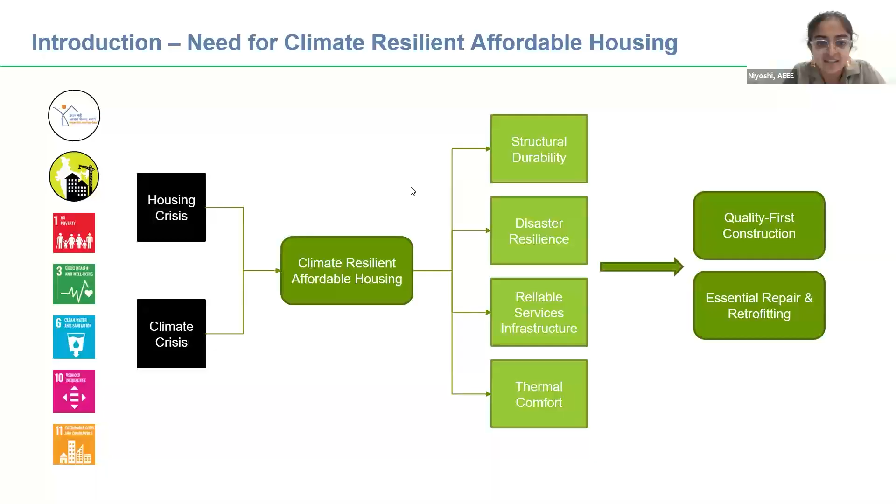Thank you for setting that context. So to talk a little bit about Baprola and why we chose to start from here.

One thing to highlight is right now India's official estimated housing shortage is about 19 million homes. There are also independent studies that say this ranges between 29 to 50 million homes. So when you have such a large housing shortage, it's important, of course, to build new housing, but it's also important to look at what housing is already built and how can you ensure that continues to remain livable, and the investments that have happened in the past continue to bear fruit today, are useful, and we're making the most of those.

That brings us to a particular kind of housing that has been built historically in India. The approach has been to deal with the housing crisis by building affordable housing. So under Rajiv Awas Yojana, under the Jawaharlal Nehru National Urban Renewal Mission, and now under PMAY, we are building housing.

When we look at some of the housing that's been built in the past, it was built for slum rehabilitation, where people are moved from informal settlements into new colonies that are built. When we look at some of these older colonies, we see that a lot of them are still lying vacant. In Delhi itself, about 30,000 homes remain vacant that were built over a decade ago. And the ones that are occupied face very visible issues. Baprola falls under the latter—it is a resettlement colony in West Delhi that was completed in 2014.

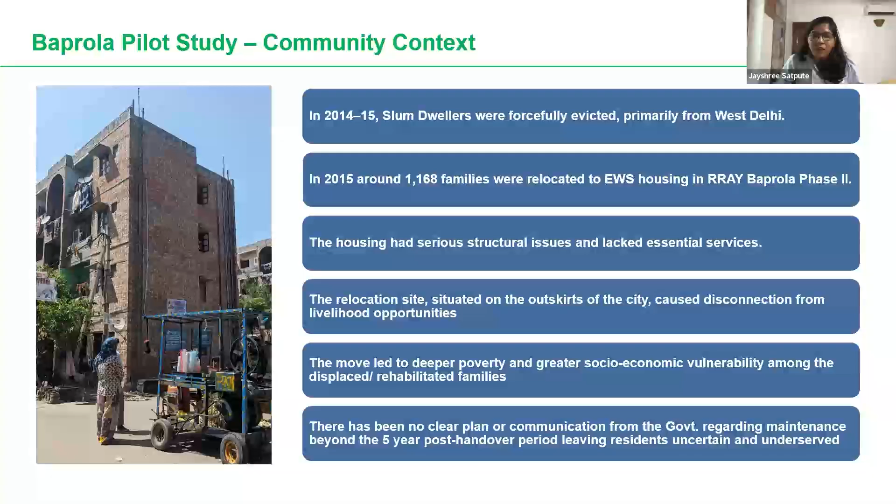Also, the government was supposed to do the maintenance for 5 years, and after 5 years, the maintenance was to be handed over to the local RWA. But there was no clear communication with the communities on how the RWA should be formed, which RWA the maintenance will be handed over to, what are the benchmarks for those RWAs, and so on and so forth. So no communication as such.

Niyoshi, can I have the next slide, please?

इन सारे मुद्दों को लेकर के जो कम्युनिटी में महिलाएं हैं, 10-12 महिलाएं, वो ऑर्गेनाइज हुईं, और मैंने और मेरे कुलीग्स ने उन्हें जो लीगल एंटाइटलमेंट्स हैं और जो पॉलिसीज हैं उनके बारे में जानकारी दी, और उस जानकारी को लेकर के दीदियों ने एक केस फाइल किया दिल्ली हाई कोर्ट में राशन की दुकान के लिए।

So many of the community members were still registered in Jwalapuri, and they had to travel from Baprola to Jwalapuri to get their ration. Now that was counterproductive because the amount of money it would take to travel from Baprola to Jwalapuri didn't make sense to travel that far to pick up the subsidized ration.

तो दीदियों ने एकजुट होकर के अपने कम्युनिटी से कंसल्ट करने के बाद एक दिल्ली हाई कोर्ट में रिट पिटिशन फाइल किया, और उस रिट पिटिशन के तहत दिल्ली हाई कोर्ट ने बपरोला में राशन शॉप खोलने के लिए निर्देश दिया। Based on that decision, now there's a ration shop which is open close to RRAY, and people can just walk to the ration shop to pick up their ration.

उन्होंने बस राशन की दुकान खुलवाई ही नहीं, पर उसकी निगरानी भी करी, जैसे accountability। They've held the ration shop owner accountable every now and then whenever they get a ration which is not up to the quality, or the quantity of ration is not as per their statutory right।

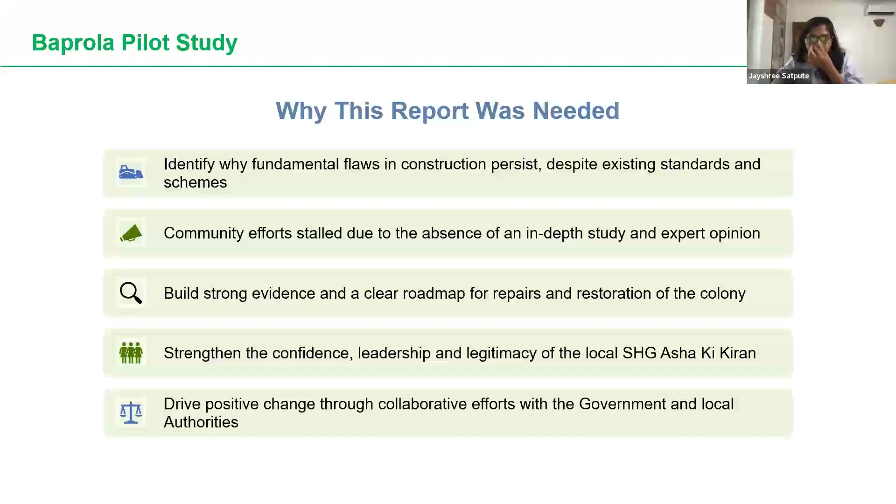I think इस स्लाइड को मैंने ऑलरेडी गो थ्रू किया है, but just to again say that these buildings are very volatile. अगर earthquake आता है, जैसे आज सुबह ही रशिया में 8.8 earthquake आया था, that was a massive earthquake. So these buildings do not have the strength in them to withstand even, I'm just putting a number there, a 5 or 6 scale earthquake, but saying that these buildings do not have strength to withstand a strong earthquake.

तो हम चाहेंगे कि इन पे काम हो ताकि कम्युनिटी की सेफ्टी अश्योर हो सके। और आगे जाकर जो भी rehabilitation colonies बनती हैं, where EWS communities are given rehabilitation, they should comply with all the structural standards and should be safe, and should have all the amenities which the community requires to upgrade the standard of living. Yeah, so that's about it.

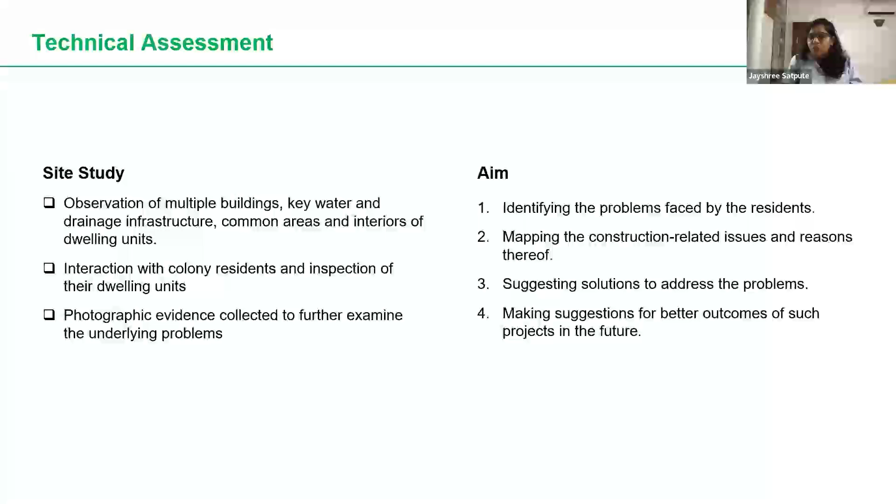Over to you, Niyoshi. Thank you, Jayshree, for setting that context. I think it matters because when there is already such a range of issues that someone has to face living in an EWS housing project or when they are rehabilitated, it is even more important that at least the foundation of the house given is stable and secure, and not another issue that needs to be dealt with. And even from a construction and development point of view, think of the money that goes into repair, maintenance, and retrofitting — how do we reduce that so the first investment is most efficient when made at the beginning itself?

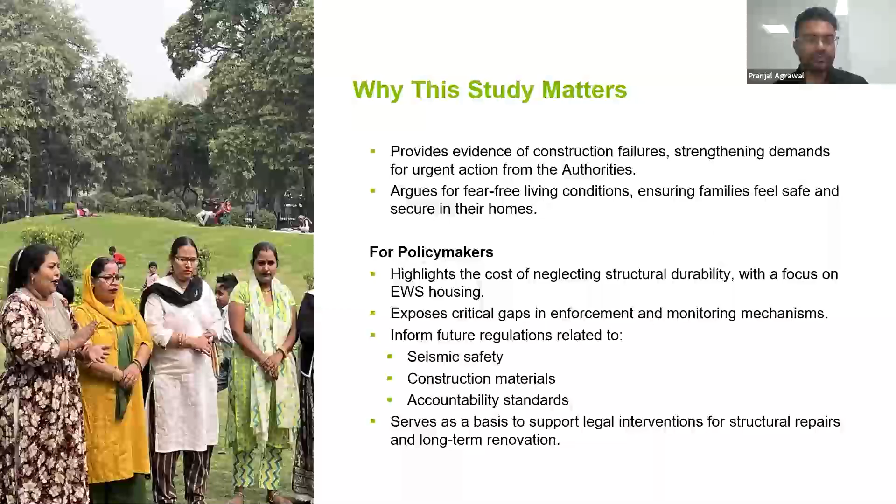I will hand it to Pranjal now to go into the assessment of Baprola that was done by Design Access. Thank you, Niyoshi. So I think we can move to the next slide now. Can you change? Yes, thank you.

So hi everyone. So when AEEE called us to be a part of this project, we were very excited. It was the first time we were going to do a study like this, where we studied an existing society and found out the issues people were facing there, and how we could give probable low cost solutions to these people, because of course they are from the EWS society, and money matters there in terms of construction, repair, and maintenance.

So we started by doing a site study. We went on the site. The moment we entered, for me it was a total disaster. On the ground, dirty water was coming from the sewage lines, and the outer walls of the buildings, since it's a brick facade, were deteriorating due to atmosphere and wastewater — the bricks were deteriorating.

So we decided to choose one tower. Since there were a number of towers in the society, we decided to take one tower as our study base, and we went inside that tower and talked with the residents. I remember there are around 16 units in one tower, and each unit has its own problem.

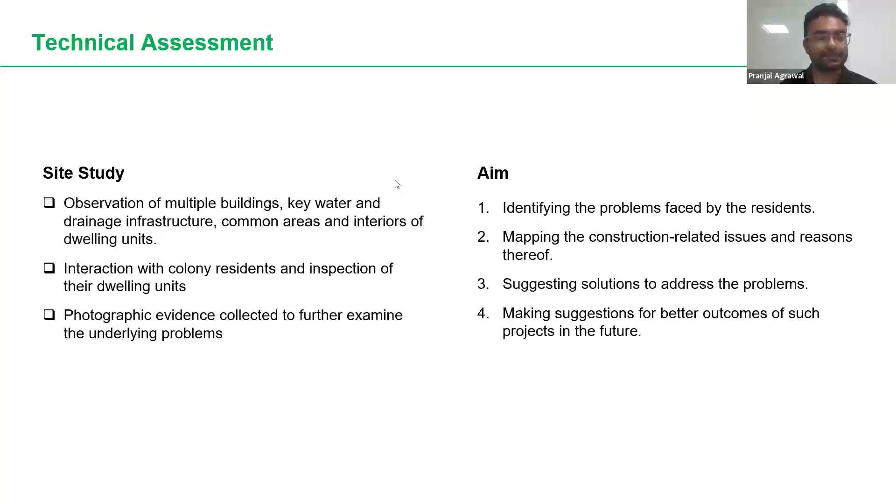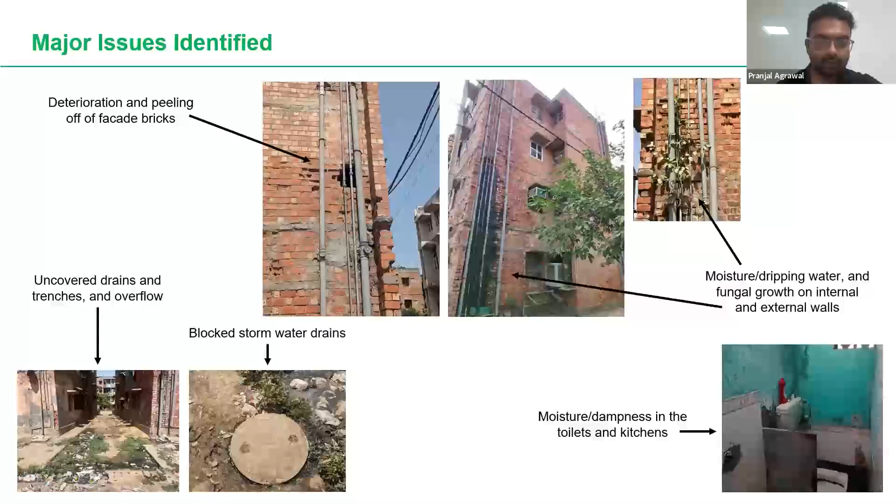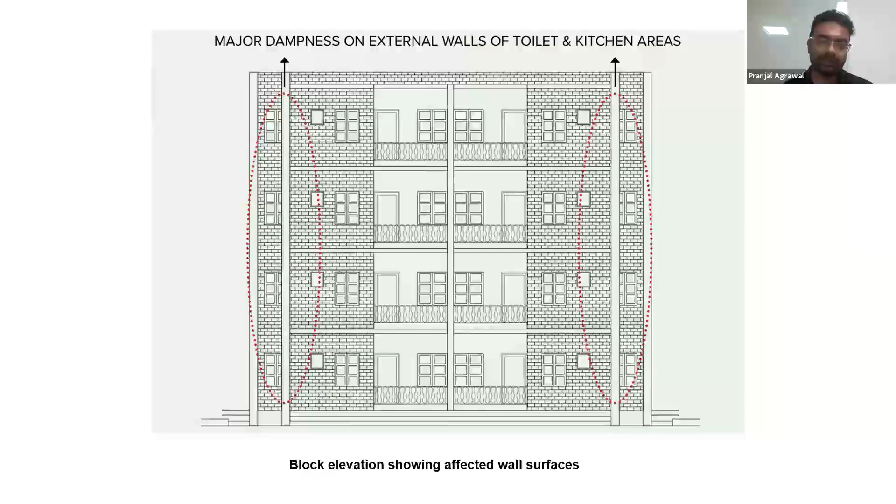सबसे ज़्यादा खराबी बिल्डिंग के फसाड में, बिल्डिंग के इंटीरियर में ग्राउंड फ्लोर पे आ रही है। तो हमें ये क्लियर था कि प्रॉब्लम पानी की है, सैनिटेशन की है, अंदर की जो पाइपिंग है उसकी है। अब इस पे हमने कुछ सॉल्यूशंस दिए थे जो हम नेक्स्ट स्लाइड में बात करेंगे। तो हमने सॉल्यूशंस को 3 पार्ट में डिवाइड किया। वी डिवाइडेड द होल सॉल्यूशन पार्ट इनटू 3 बेसिक सेक्शंस: इंटरनल एरिया, एक्सटर्नल रिपेयर्स एंड द साइट लेवल वर्क। इंटरनल एरियाज, अंदरूनी एरियाज में हमने ये solution दिया, which is of course a very basic solution.

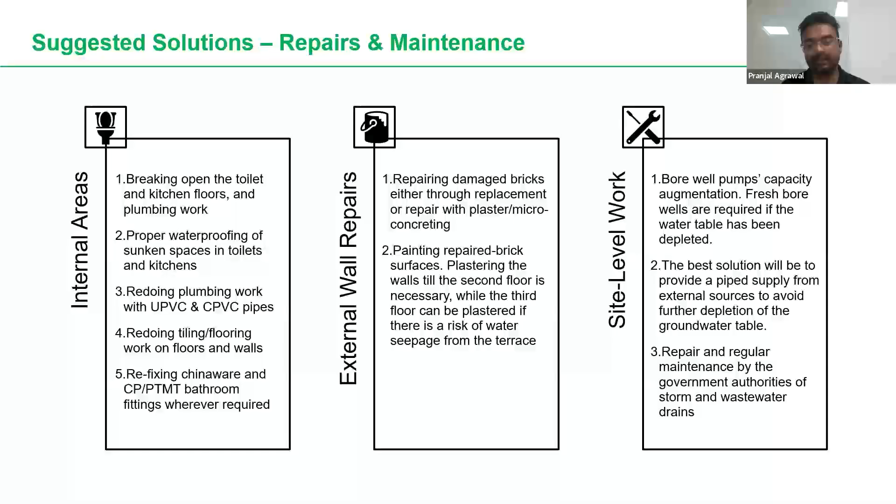AEEE, Jayashree ji - it is also the work of the existing authorities, the responsible authorities, to come together and find a solution that benefits everyone. That's it from me, Niyoshi.

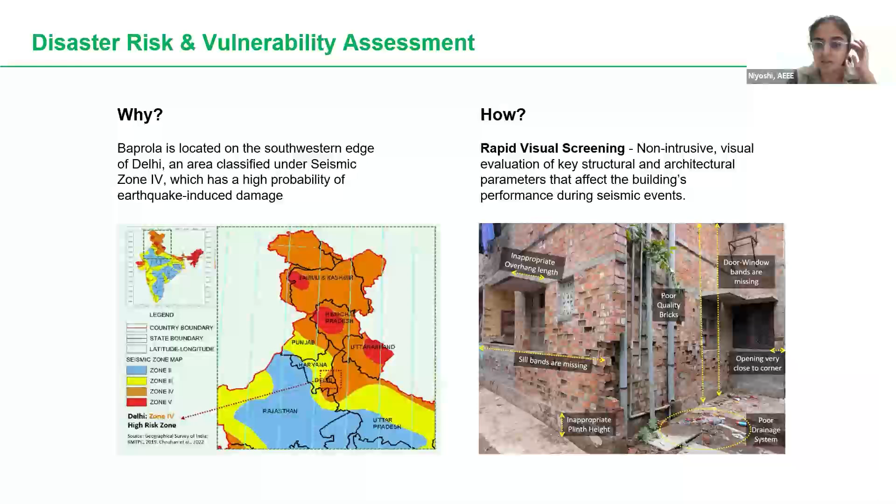तो रैपिड विजुअल स्क्रीनिंग में हर ऐसे बिल्डिंग कंपोनेंट को एक बाइनरी स्केल पे मतलब 0 से 1 के बीच में एक स्कोर दिया जाता है, एक सेफ्टी इंडेक्स स्कोर। एंड फिर इसका एवरेज लेके आप देख सकते हो कि ओवरऑल व्हाट इज़ द सेफ्टी इंडेक्स, मतलब ये बिल्डिंग कितना सुरक्षित है, कितना नुकसान हो सकता है।

तो जैसे मैं ये इस बिल्डिंग का एनालिसिस है जहाँ पे साइट कंडीशन, बिल्डिंग ज्योमेट्री, वॉल, अर्थक्वेक बैंड्स होना ना होना, दरार, दीवारों पे दरारें, ओपनिंग्स कैसी है, हर तत्व का एक असेसमेंट किया गया है, उसको स्कोर दिया गया है फ्रॉम 0 बीइंग लो रिस्क टू 1 बीइंग हाई रिस्क। एंड ओवरऑल इसका एवरेज स्कोर 0.6 आता है, व्हिच कम्स इनटू द कैटेगरी ऑफ हाईली वल्नरेबल।

एंड इसके 2 मेन रीज़न हैं कि जो तत्व होने चाहिए, जैसे बैंड्स जो होने चाहिए, वो नहीं है। और दूसरा जो ओवर टाइम मटेरियल बिल्डिंग डिग्रेड हुआ है, सीपेज की वजह से या तो एक्सपोज़ ब्रिक वर्क की वजह से, जो मटेरियल डिटेरियोरेशन हुआ है, उसकी वजह से ये ज़्यादा कंपाउंड होता है ये दोनों।

एंड दे ऐड टू द बिल्डिंग्स वल्नरेबिलिटी। सो फॉर एग्जांपल साइट कंडीशन मॉडरेट रिस्क पे है क्योंकि पानी भर रहा है, ड्रेनेज सही नहीं है, तो उसकी वजह से फाउंडेशन वीकन हो सकता है। फिर वॉल इज आल्सो हाई रिस्क, मॉडरेट रिस्क, बिकॉज सीपेज हुआ है, नमी है दीवारों पे, क्रैक्स दिख रहे हैं।

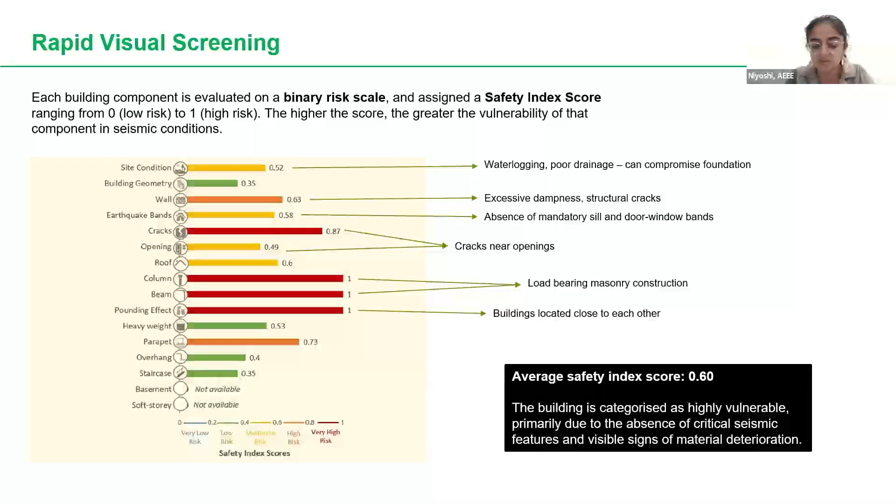तो बेस्ड ऑन दिस रिपेयर मेजर्स के बारे में प्रांजल ने बात किया, जो घर के अंदर हो सकती है बिल्डिंग लेवल पे और साइट लेवल पे। तो फिर अर्थक्वेक रेजिलियंस के लिए भी रेट्रोफिटिंग मेजर्स है जो एक मतलब कोई अपने घर में अकेले नहीं कर सकता, वो एक बिल्डिंग लेवल पे और साइट लेवल पे करने की ज़रूरत है। और उसके लिए एक डिटेल्ड वल्नरेबिलिटी असेसमेंट करना ज़रूरी है। उसके बाद दीज़ मेजर्स शुड बी इम्प्लीमेंटेड।

तो पहले हो गया प्रोविजन ऑफ अर्थक्वेक बैंड्स, जो मैंडेटरी नेसेसरी अर्थक्वेक बैंड्स होता है, उनको रेट्रोफिट करके ऐड करना। फिर जो दीवारें कमज़ोर हो गई है क्रैक्स की वजह से, नमी की वजह से, उनको स्ट्रेंथन करना, क्रैक्स को भरना। फिर ड्रेनेज और साइट इम्प्रूवमेंट करने से सॉइल इश्यूज भी सॉल्व होंगे और आपका फाउंडेशन भी स्ट्रांग होगा।

ये दोनों भी कनेक्टेड है। नॉन स्ट्रक्चरल रेट्रोफिटिंग ये हो गया जैसे कि दीवारों बिल्डिंग में वो जो पैरापेट होता है, ओवरहैंग होता है, जो स्ट्रक्चरल कंपोनेंट्स नहीं है बट दे आर अटैच्ड टू द मेन स्ट्रक्चर, उनको ठीक से एंकर करना, ठीक से कनेक्ट करना मेन स्ट्रक्चर से, so that they are not damaged in case of an earthquake.

एंड रूफ पे, छत पे जो हैवी ऑब्जेक्ट्स है, तो एक बात जो नहीं हमने अभी तक टच अपॉन किया है इसकी, यहाँ पे हर रूफ पे वाटर टैंक्स है, पानी की टंकियां है, पर वो खाली है, दे आर नॉट बीइंग यूज्ड। तो अभी के लिए दे आर जस्ट like heavy objects on the roof not anchored. So anchoring such objects so that in case of an earthquake, again, they don't fall and cause further damage. So these are some of the retrofitting measures.

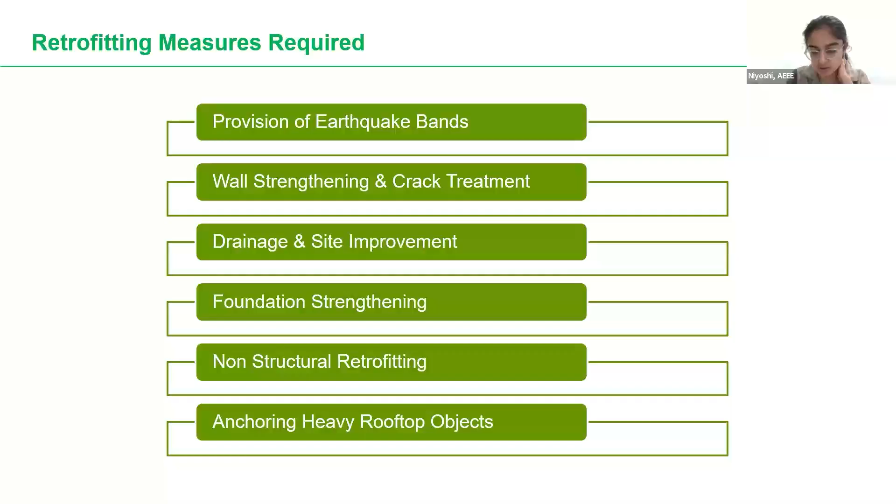Now, what recommendations come out of this analysis for future projects, including both the technical and the disaster resilience analysis?

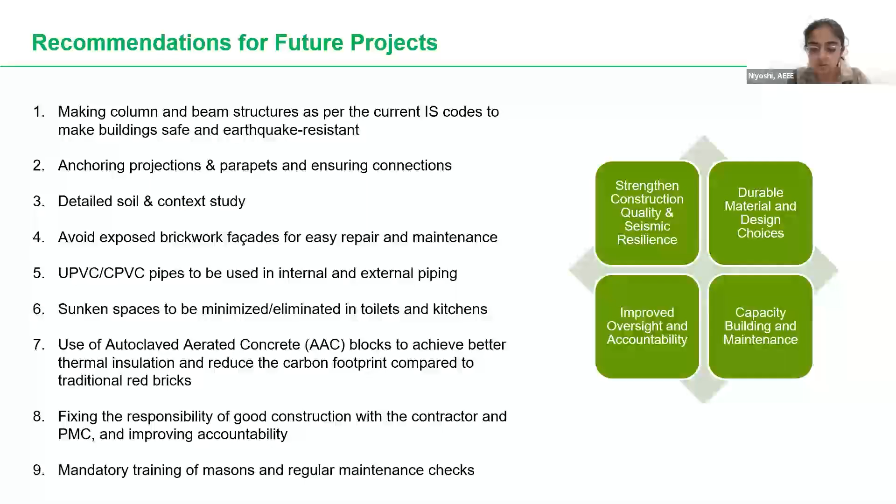So to summarize, when we look at climate resilient affordable housing, we discussed these 4 things earlier: structural durability, disaster resilience, reliable utility infrastructure, thermal comfort. Now clearly these need to be taken care of.

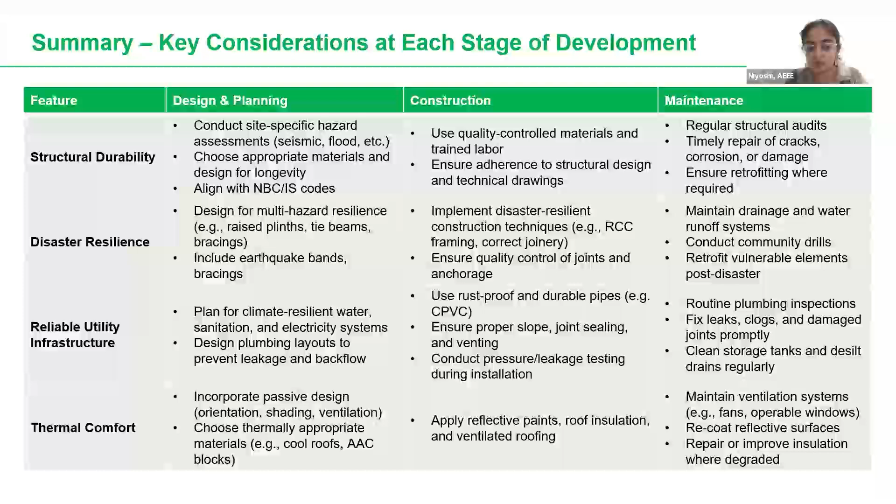So that brings us to the end of the presentation. We have done this pilot study, but there are many open questions after this. One point of this webinar is to share what we've done and get questions, feedback and ideas for how to take this forward, because it's not easy - if this problem were easy it would have been solved long ago. But one thing is clear: if retrofitting is necessary in existing EWS housing projects, as our study shows, then how can this retrofitting happen, what stakeholders would need to get involved, how can we mobilize resources, how does that actually happen.

Right now in PMAY there is a new vertical called Affordable Rental Housing Complexes, where the government has also recognized that we have many buildings that are built but not used for affordable housing. So now they want to repair and upgrade those and turn them into rental housing. That is one place where it's recognized that existing building stock needs improvement - so is that where we can focus on retrofitting, and how can we do that?

Then there's construction practices and quality - you can provide detailing and ensure whatever you can at the planning stage, but how can quality assurance be better? Where can community participation be brought in, where can they be involved? Because as Jayashree mentioned, a lot of efforts have been done by active members of the community. So when we talk about construction, what role can they play in construction quality monitoring - that's another stakeholder to think about in this.

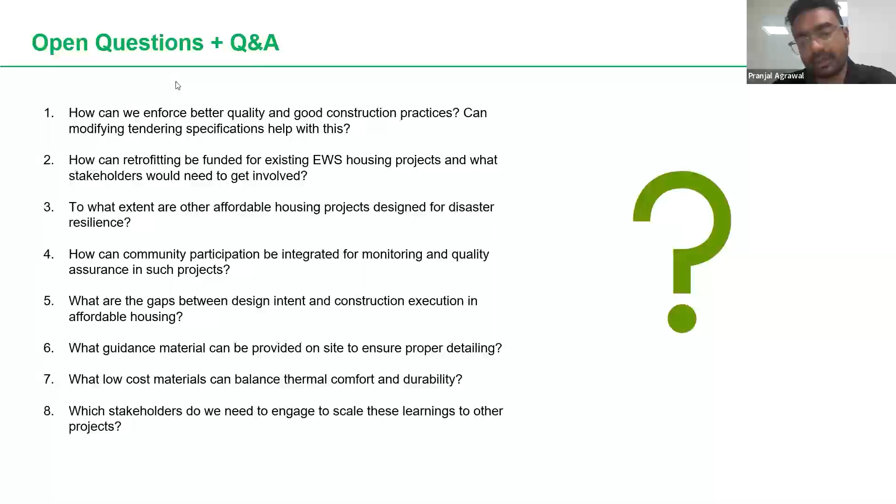The site was supposed to have a closed drain, but as I said, there was a problem of theft, so the covers were taken away by someone, and the drains are now open. We can see plastic waste gathering all over it. Also, the STP nearby is clogged and choked, so all the drain water that was supposed to go to the STP isn't going anywhere—it's just scattering around the site. During the rainy season, it gets waterlogged. It's worse in the rainy season.

Okay. Dr. Patil, I see you have your hand raised. Dr. Patil, do you have a question? Oh, we can't hear you.

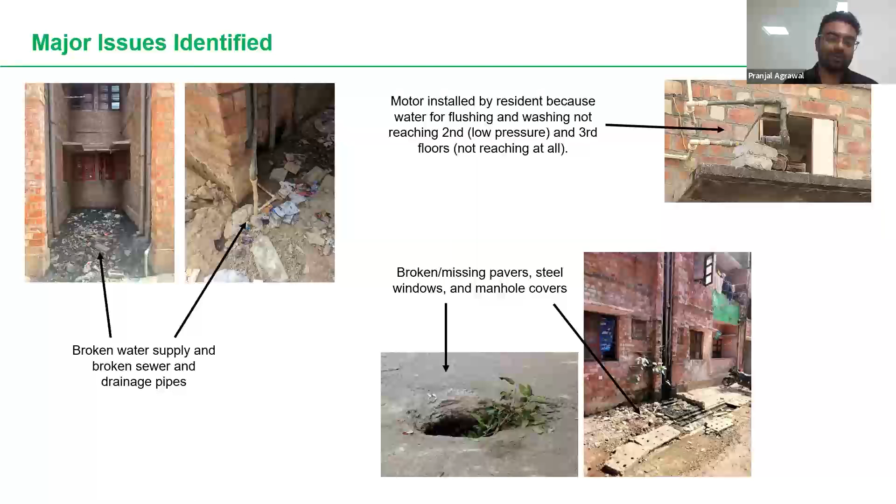The major problem occurred during the construction phase. As you rightly said, builders might not follow what architects give them, to cut costs or for other reasons. So I think that could have been the case here too. We might have to do some extra study and talk to more people to get clearer evidence, but to conclude, yes, this is a case here too.

Thank you, Pranjal. And just to add to the response, these houses were built by the government corporation called Delhi State Industrial and Infrastructural Development Corporation, DSIDC. So it's not a private actor who built this; these are government actors who built this without any accountability, and the maintenance was not done at all.

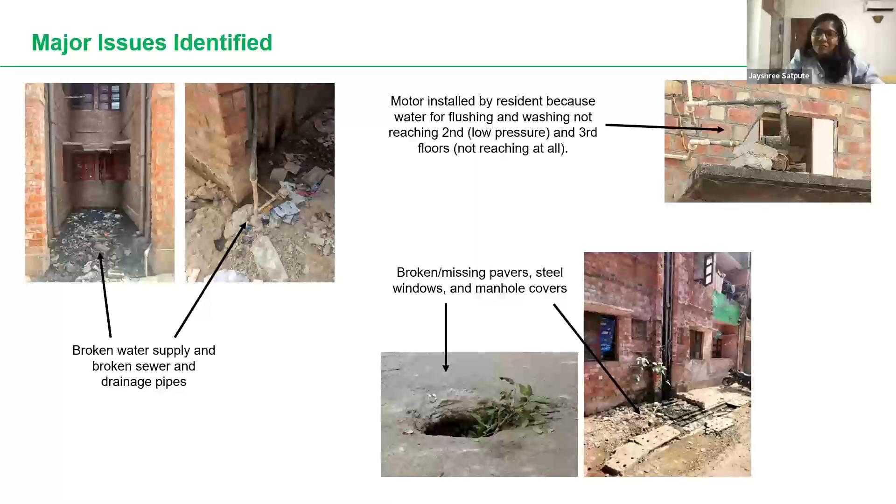And your question about loss and damage, it's a concept I'm also fairly new to, so I'm still trying to understand it myself.

I think that's an interesting point, that this could be related to that. Because from what I understand, it's usually the damage that happens when an adaptation measure has been implemented, but inadequately. This is something new for me to think about, actually, that you have brought up.

I just wanted to say we are trying to work on that because these are the areas included in climate risk, future climate risks that we can see. So from that perspective, we are trying to work out how we can fit that into a loss and damages perspective, and the PPP model that ma'am mentioned.

One of my friends who lives in a slum said something interesting. He told me that before we were living in horizontal slums, now they want us to be in vertical slums. That's what is happening in Mumbai, if you can see.

Absolutely. We have one more question, RS Negi. I think it's written in the chat, so I can answer some part of it, and then you can take over.

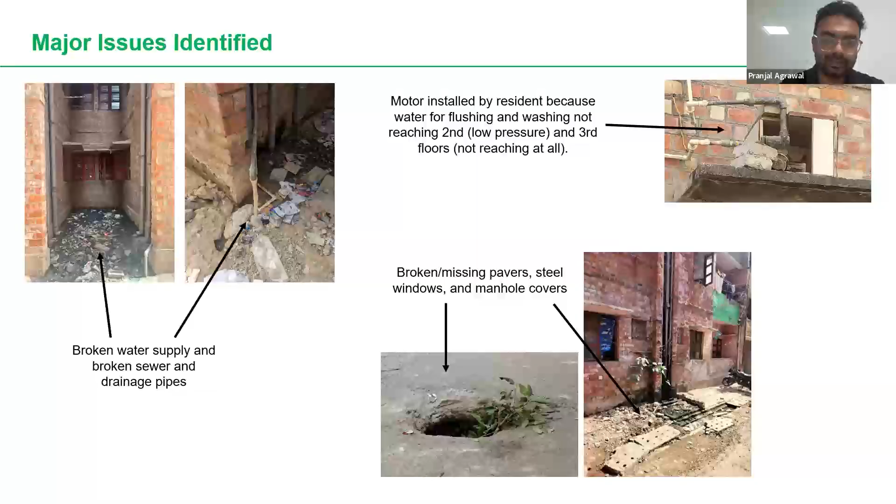In terms of improving the existing building structure, since people are living there and the building is already erected, the foundation and plinth level part, it's not possible to do much in this case. Except from the exterior boundary, we can put some extra reinforcement, but inside the building it's not possible as of now.

As we come to the upper floors, the superstructure, we can give some more reinforcement. We can give earthquake bands next to the windows. We can remove those window openings, and the bands can be given around the openings. So all the parts that can be done on the exterior are possible, but the foundation part or the connection between the buildings, something can be done on the superstructure, but for the foundation or substructure, it's very hard to comment.

I think Dr. Patil also wrote in the chat. Of course, the buildings are not earthquake resistant. If we see the structure drawing, on the corners they have provided steel bars for some vertical reinforcement, but those are not enough for a big earthquake. For a 3.4, 3.5 magnitude earthquake, it's fine, but if a big earthquake comes, magnitude 5, 6, maybe 6.5, there will be big damage to the towers.

I think you can take over the next question. A point raised in the chat by Parag Parikh is: can government make provision in the form of an umbrella insurance policy for EWS housing residents, and use that as a way to fund long-term maintenance and retrofit? That is interesting, I have not thought about this before.